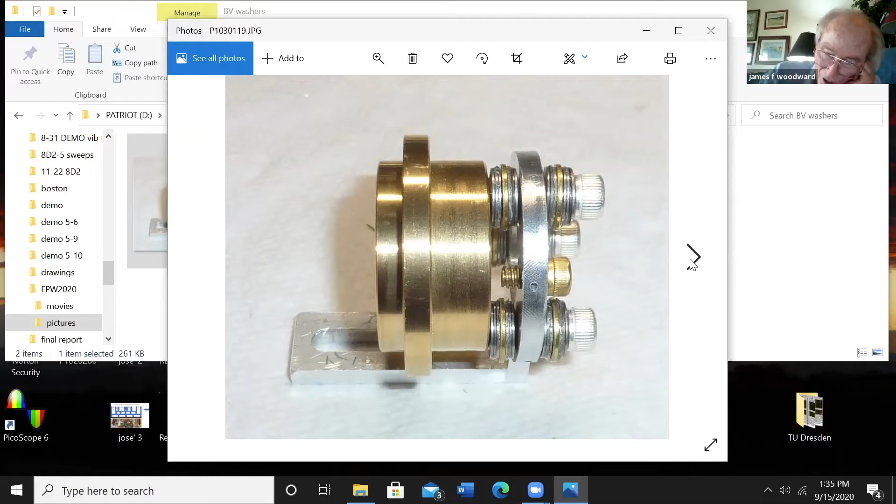John wasn't in the machine shop, so all of this was done with hand tools. This is another view of the same device. You'll notice over here that there's a flange on this reaction mass.

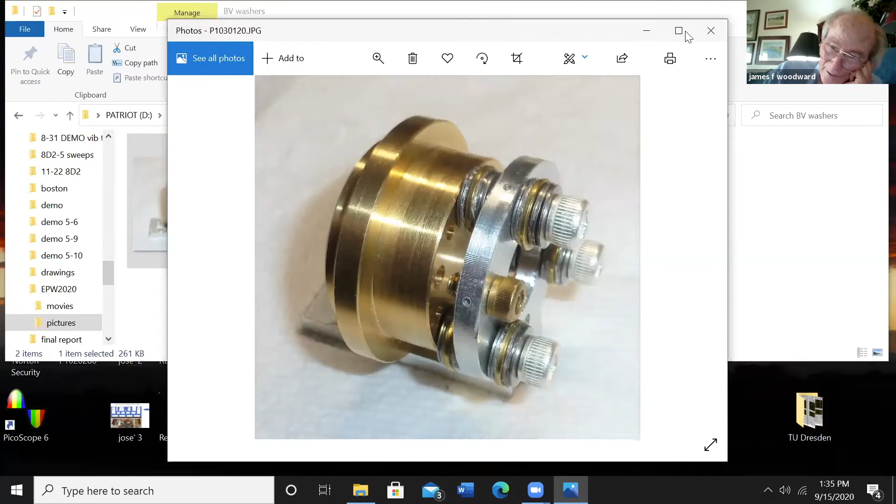Basically, what happened was in early June, I looked at that and I looked at the flange, which was there because Paul and Michelle were talking about a design that involved some really big, heavy, clunky Belleville washers. I looked at it and I said to myself, gee, maybe you can stick the dowels through that and get rid of all of this stuff with L brackets and washers and stuff like that bolted to the back of the reaction mass. Okay, and that is in fact exactly what we did.

Okay, let me go back. Where the hell is back? Here's back. Okay.

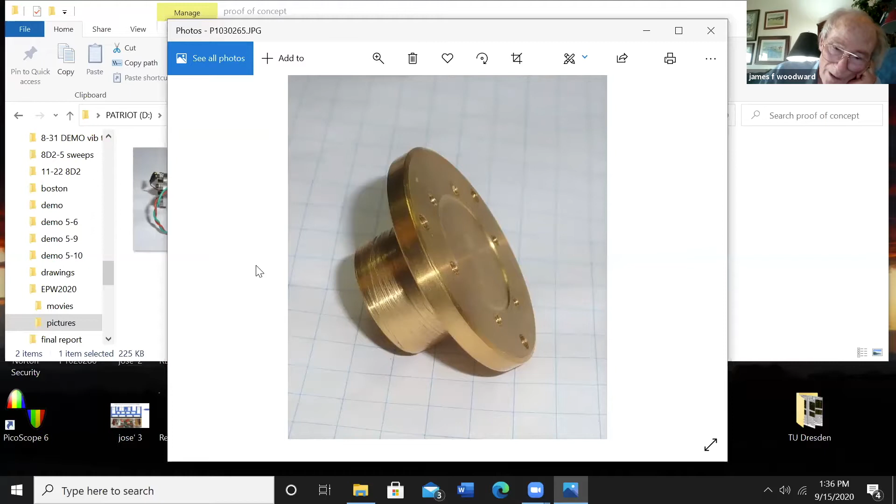Basically, what I did was I said to myself, if we make a reaction mass like this, which is just a 7/8 diameter cylindrical reaction mass, nothing bolted to the back or anything like that, and you move the flange that you saw in the other case up to the interface with the PZT stack here, and you put 3 holes through it like so, you can line those with Teflon and build an aluminum frame around it, and the aluminum frame around it, let me get back here, will give you this as a proof of concept device.

Okay, you'll notice that there are lots of washers under the bolts that hold the stack onto the reaction mass and so on. But here's that flange sitting on a 3/32 steel dowel. There's another one down here and the third one in the background. Little rubber O-rings stacked as stops for the thing to move, but other than that, there's no pressure on the flange, so forth. And we ran that, and lo and behold, it worked. It started producing stuff in the tens of micronewtons range.

Okay, the duh moment involved was, gee, let's just move the mounting system, which in effect tries to decouple the high frequency vibrations from the rest of the apparatus. The idea here is that the high frequency vibrations are the ones that produce the Mach effect. And when you have them hooked up to anything else that tends to damp those high frequency vibrations, the Mach effect goes down the toilet.

So the rubber pads and all of the Belleville washer arrangements and all that were less than ideal because they all tended to attenuate high frequency vibrations. This system in principle should not attenuate high frequency vibrations. The only forces that would do that are frictional forces, and that's why those things were lined with Teflon tubes. Okay, and it was clear that this was a preferable way to go.

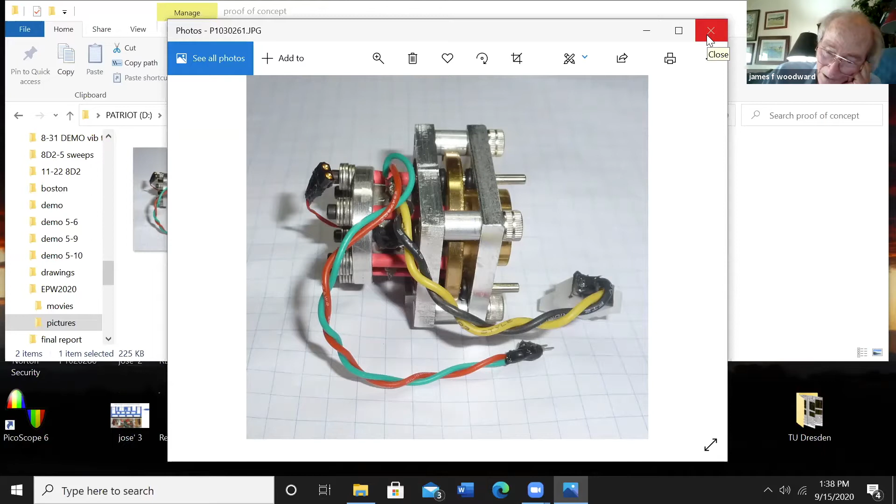There was a second duh moment in this, and the second duh moment was Jose's. If Jose wants to tell you about it, I'm perfectly happy to have him come over and take over and tell you about it. If not, I will continue. Jose? Ah, Jose's not interested. Jose's not talking while the flavor lasts.

Okay, here we go. The second duh moment was, gee, it's really nice to have Teflon and all that, but Teflon on steel has a coefficient of friction of 0.01, which is a lot smaller than the coefficient of friction of brass on steel, and so on. But maybe what we can do is make a phase 3 proposal to NIAC on grounds of introducing linear ball bushings instead of Teflon lined tubes.

Because if we have linear ball bushings in there, given the high frequency vibrational environment, you don't have any stiction or static friction involved because of the vibration, which makes these things, if you have linear ball bushings sitting on those rods, essentially frictionless, which means that, if you don't have anything pressing on the ears that hold the ball bushings, it makes the thing essentially the equivalent of doing this in free space. Okay, so you've seen the proof of concept.

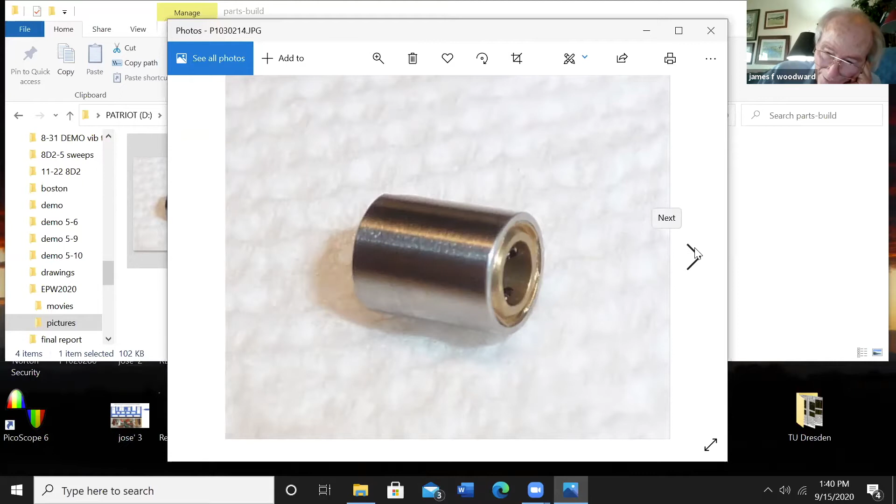Linear ball bushings, which look like this, okay, that's a linear ball bushing. Paul and Chip can tell you about how we got to these. They're 2 millimeter ID and 4 millimeter OD by 5 millimeters length, okay? And those things get stuck in the ears of, let's see, I'm not sure if I've got the sequence of this. Yeah, let me go on here.

The ones that are being built now, the flange that holds the ball bushings is reduced in thickness so that the ball bushings stick out about 30 thousandths on either side, and they will ultimately be used to center some helical springs that are used with them.

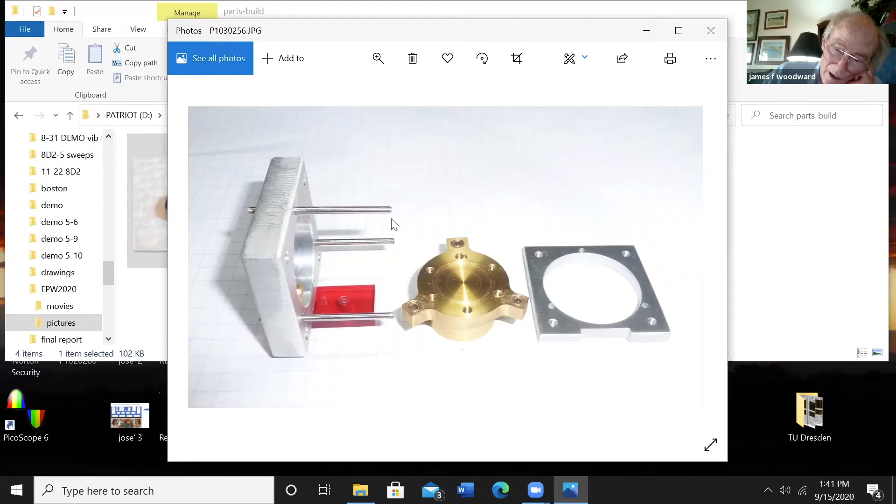As long as there's no pressure exerted by the springs when it's sitting there like this on the ears, there's no trouble. It turns out that if you apply pressure to the ears of the sort that you would apply by compressing the springs significantly, it screws up the behavior of the device and the effect goes away. But as long as the springs don't apply any pressure on there, I'll show you a movie of what happens with this device in a moment.

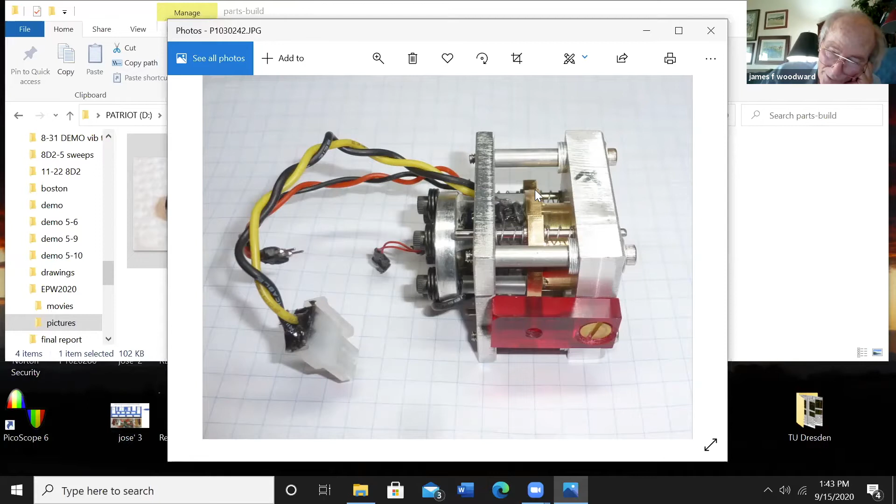Okay, now, all right, we're finished with that. Proof of concept. Question is, how do I... this is how I do that. Okay, I'm not going to show you the thermal stuff. I showed you that this morning.

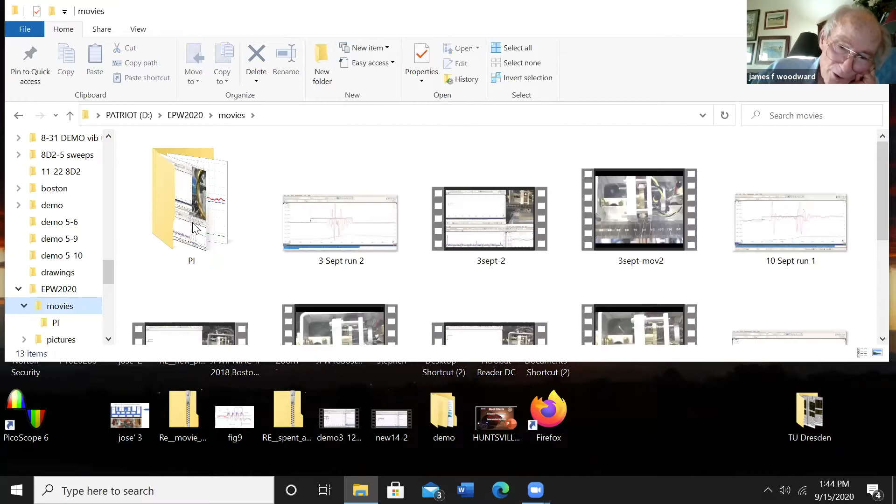Let me show you a movie of how that thing works on the device that we're talking about. This is PI. I'm showing you this not because it shows you a really spectacular run. You can actually see the end result of the runs in these two PicoScope traces that are in front of you now. The one on the right is run at a little bit higher power than the one on the left. And you can see this thrust effect here.

That's peak. This is the peak to peak. This is the full scale 40 micronewton scale. So you're talking about half a dozen micronewtons or thereabouts for the event. But what this does very nicely is it shows you very clearly that that thrust event only occurs when you have the second harmonic come into existence and with the right phase.

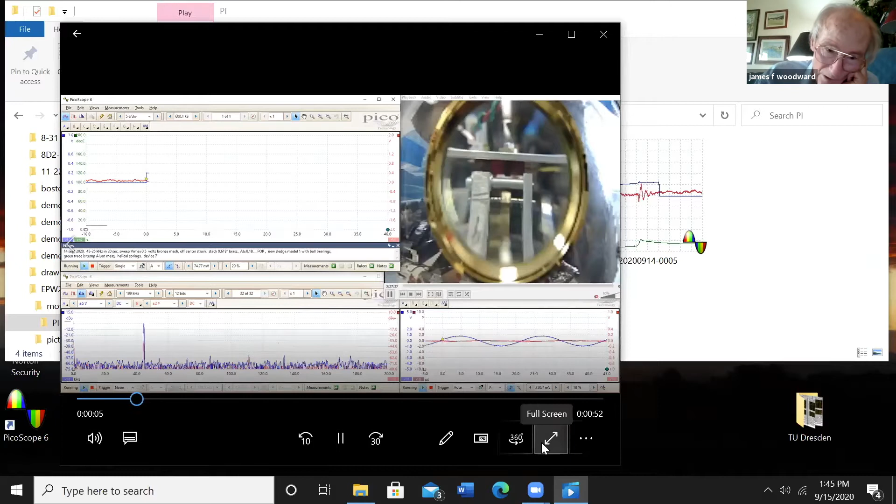I'm going to show you the movie now. Let's see what this comes up as. Do you want me to expand this? Yeah, I may as well. Okay, here we go. Now, the FFT, there it comes on, second harmonic, there's your signal, and then the second harmonic goes away.

Okay, let me stop this and run it back through that event again without all of the lead in. Watch the second harmonic down here. There it goes. Now it's gone. If you look at the waveforms over here, Hal's got the waveforms and voltage scales set for much higher power operation. So there's not too much to see, I'm afraid.

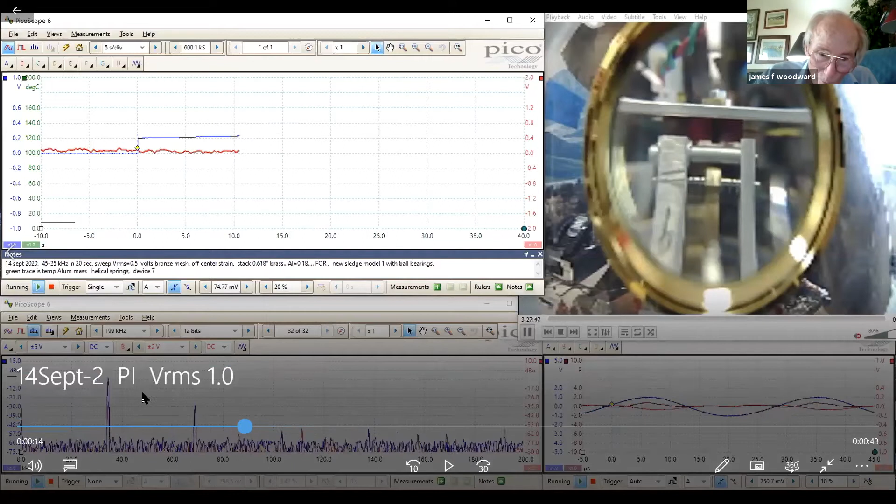But if you look very carefully at the waveforms over there, actually I can move this slowly through them. You can see the red trace in the waveforms. You have second harmonic presence, and there's not much second harmonic presence in, well, there's a little bit in the blue trace, which is the voltage and so on. And then it goes away, and all you see is the voltage trace.

Now what you're going to see when I, in about 2 minutes or less, yield this over to Paul and Chip and Michelle, is stuff that's at least as impressive as that. What you'll see is actually a movie or two, I hope. Michelle has got the movie or two going. Okay, let's see, let me collapse this, and get rid of this.

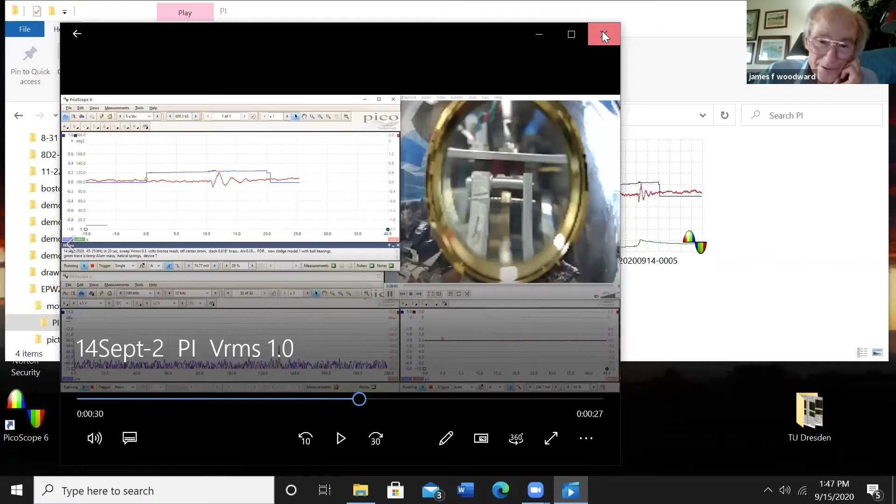What they are going to do is they're going to tell you about how we have gotten from, to me, just fooling around with the PI Ceramics, makes a disc that is similar to, but not exactly like, the Steiner

Martin's 111 discs. She's unshared my screen. Yes. So you're seeing my mug as I say this.

Okay. Yes. All right. PI Ceramics makes material that has a higher stiffness, mechanical stiffness, and a slightly lower dielectric constant than the Steiner Martin's 111. The Steiner Martin's 111 produces really very, very nice results. Okay. We tried the American Piezo Ceramics materials, which is a little bit worse in stiffness and a little bit higher dielectric constant, and that doesn't work very well at all.

Okay, so this was a test of other materials, and if we get done early enough, Hal can run the device, which is in there. VRMS on the signal generator is the way in which we adjust the amplitude of the voltage across the device. The first one, which showed a little bit of a wiggle, was at VRMS equal 0.5 volts. The one that I showed you the movie of is at VRMS 1.0 volts, and she's going to do VRMS of 1.2 volts if we get to a real life demonstration of this.

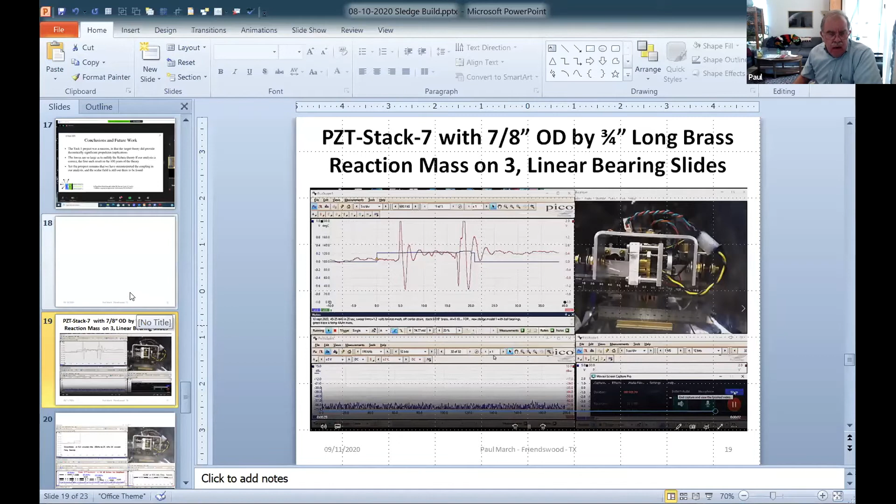I did the same plot that I just showed you, dialed back to five seconds into the run, right at 40 kilohertz. There's the fundamental at 40, and the second harmonic at 80 kilohertz. The main thrust is generated on either side of the resonant peak between the fundamental and the second and fourth harmonics, and it's very phase dependent on which side of the resonance you're on. Above it produces negative thrust, below it should produce positive thrust, depending on your units.

So the problem with doing a frequency sweep is that you're generating a positive thrust pulse and then a negative thrust pulse just as you go through the resonant peak. So I agree with Jim, we're probably producing hundreds, if not thousands, of micronewtons.

Please note, the thrust will be proportional to the second harmonic amplitude relative to the fundamental. It's currently down about 26 dB. Jim is relying strictly on the SM111 and the other materials' self-harmonic generation. We're not injecting these signals; they're being self-generated because of the electromechanical interaction of the stack and the amplifier.

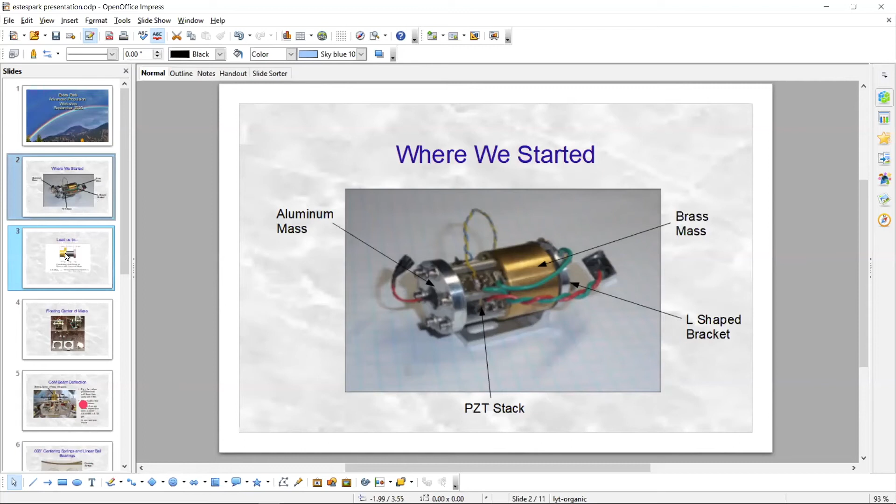I thought there were some limitations to it, which led us, after some really good Zoom meetings, to decide we would couple right to the center of mass of the device. We simply go to a null point in the vibration, and this made the device very symmetrical in operation, allowing us to look for an asymmetrical effect.

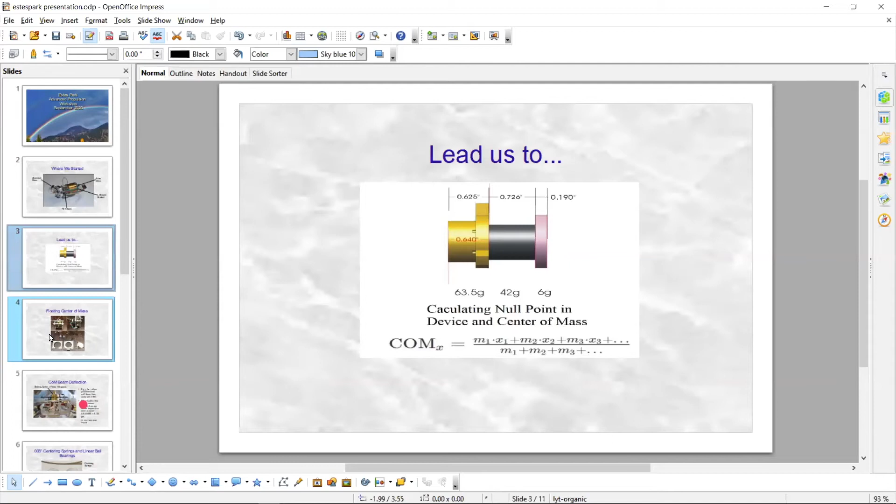So we built this, which Jim has already shown you, with the brass mass, aluminum mass, and PZT.

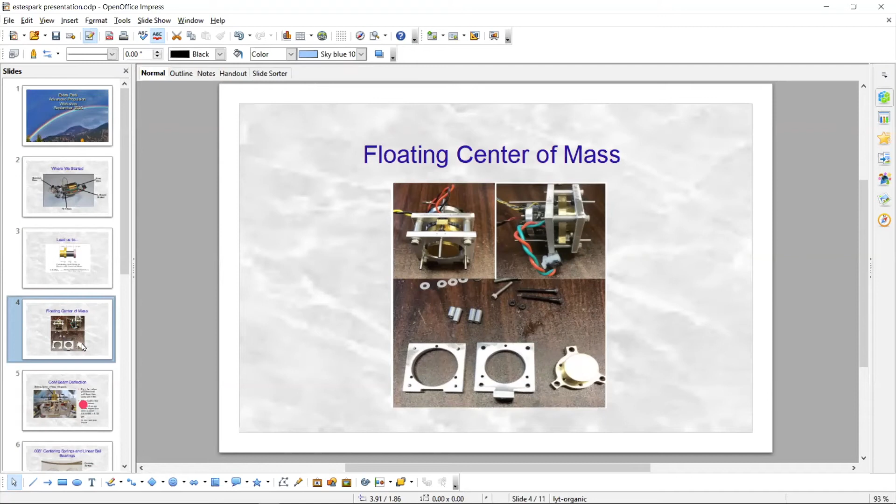Hal also showed you why we did the center of mass beam deflection back and forth with the weight, so we could get an idea of how much deviation there'd be if the device was set on the stainless steel rods for the torsion pendulum. That worked out to about 0.5 millimeters, or about 8.33 micrometers.

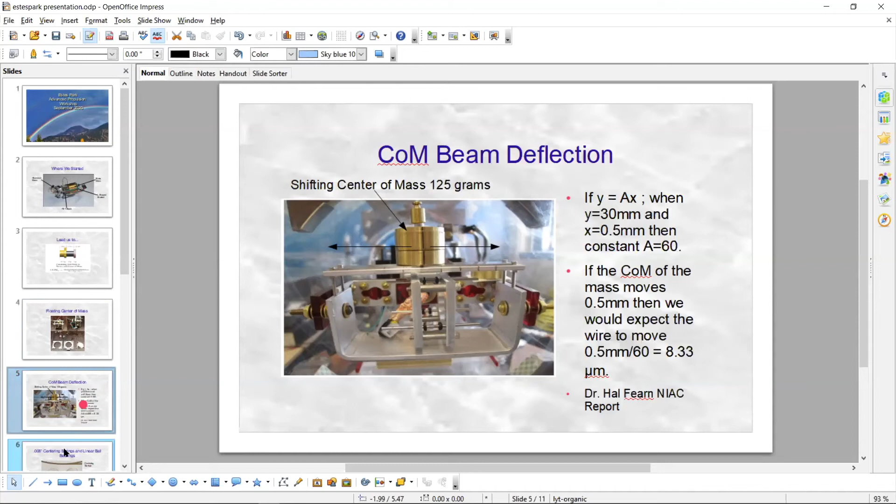We came up with centering springs because we didn't want to load anything up with friction. So we made centering springs out of guitar strings, looped them around, which was kind of hard to do. That allowed a centering action of the device on the stainless steel rods.

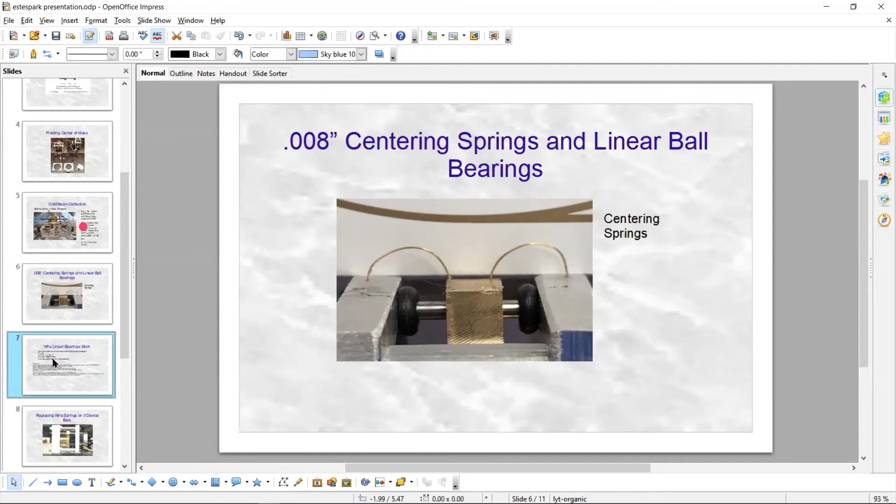There was some research done on this. Jose found that because of the friction coefficient and stiction of the linear bearings, they shouldn't move until we hit at least 412 micronewtons. Well, we were already moving, so that led us to do some extensive work into finding out why.

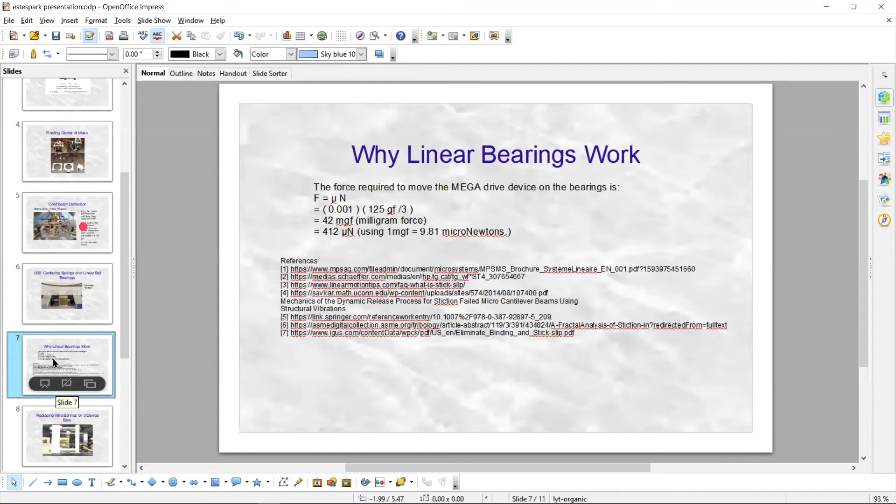What we found is that in MEMS, with cantilever beams and similar structures, one of the ways to get them unstuck is to use vibration. That's exactly what was happening: the vibration of the stack was allowing the linear bearings to float on the rods, virtually friction-free.

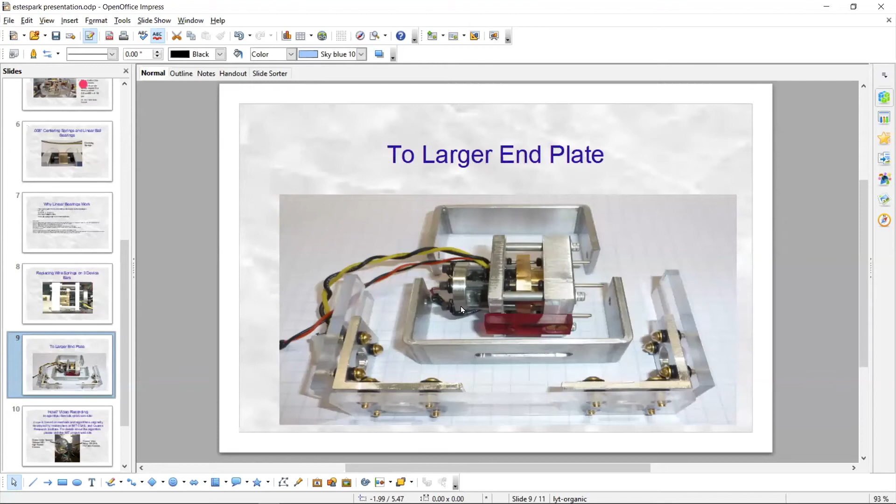So we ended up with basically an assembled setup like this, with a large mass on one end to stabilize the rods. And this is what we currently have.

I know everybody's expecting some videos, so I'll get to it, but this is the current setup. One thing I found interesting is that we took videos of the device operating, and nobody had done that before.

If you take a high resolution video of the device, you can process it and get motion enhancement. This was done by researchers at MIT CSAIL and Quanta Research Cambridge, and their company is called Lambda View.

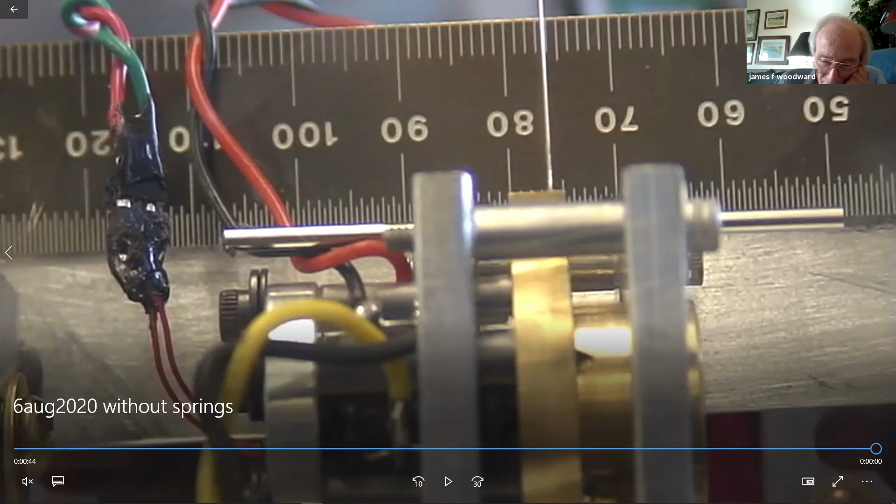George, did you get to see that? Yes, thank you. Okay George, you're going to get one of these devices, maybe two, so you'll be able to do all this for yourself. Now, what we did do is we turned around.

This is with a 40 time enhancement, to observe everything on the video. And this includes the bracket, this includes the device. Is everybody seeing this?

I'm also looking at the side bands on the harmonics that are fascinating. But with this enhancement, and this is going from 0.1 hertz all the way up to 15 hertz, what you're seeing is the response curves of the torsion arm. You're seeing the device move the actual torsion arm back and forth. You can see as it accelerates and moves the torsion arm.

This is kind of like having a laser vibrometer in your eyes. So we can evaluate the movements of the device, how it accelerates, how it compares to the spectrum analyzer, how it compares to the voltages, how it compares to the temperatures.

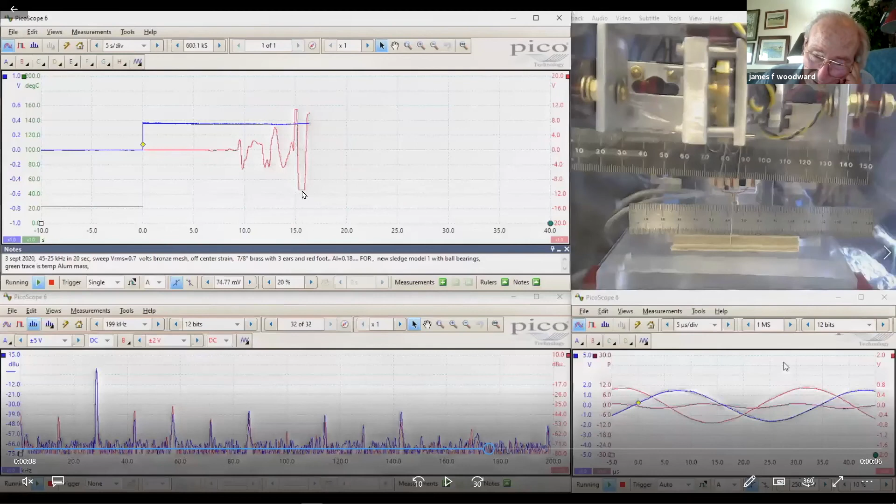So this event here at 0.1 or a tenth of a volt works. It pegged our system at about 120 micronewtons. The voltage scale on the right side and the upper left picoscope trace is 12 volts, and that's where it flat tops because of the power supply limitations on the instrumentation. It's being clipped by the amplifier and the position sensor, which has plus or minus 12 volt supplies.

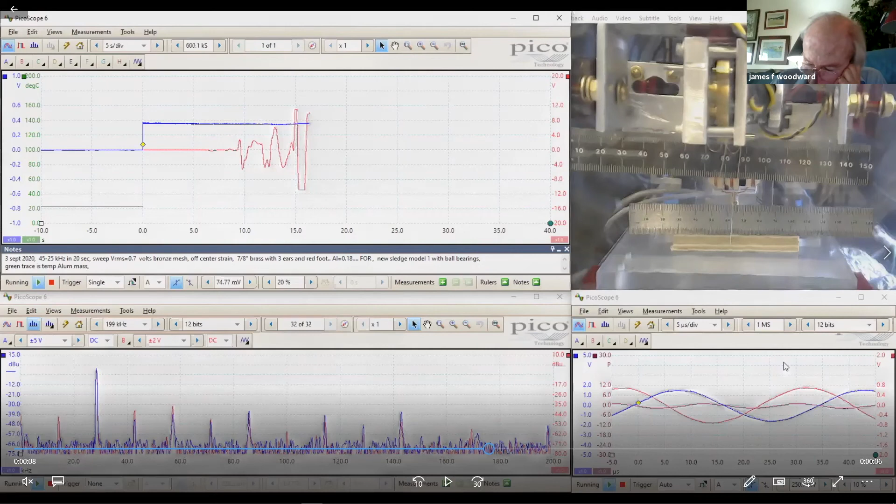We didn't expect to run into this, but we did. We're so sorry. So I'm going to go to...

Now we debated on whether to show this one or not, but this is with the springs, the helical springs. It showed such a wonderful trace because of all the video processing work that we did prior to this. It showed us that we needed to go to a helical spring to capture all the ears on the device, so that we could make it more uniform as far as transmitting its thrust event into the torque pendulum.

We have new springs on order. This is a 0.1 hertz to 15 hertz video enhanced movement. The chaff you see on your... wait a minute here.